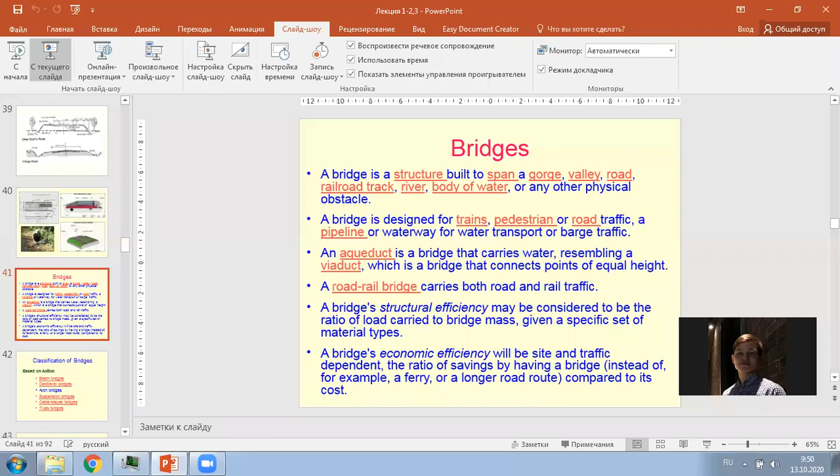Okay, so today we're going to talk about bridge construction.

A bridge is a structure built to span a physical obstacle, such as a body of water, a valley, or roads, without closing the way beneath it. This is very important for bridges, as it is constructed for the purpose of providing passage over the obstacle.

Usually, something that is otherwise difficult or impossible to cross. There are many different designs that each serve a particular purpose and apply to different situations.

Designs of bridges vary depending on firstly the function of the bridge, also the nature of the terrain near or in the construction, the material used to make it, and also the funds available to build it. The funds can be private, or from local budgets and government.

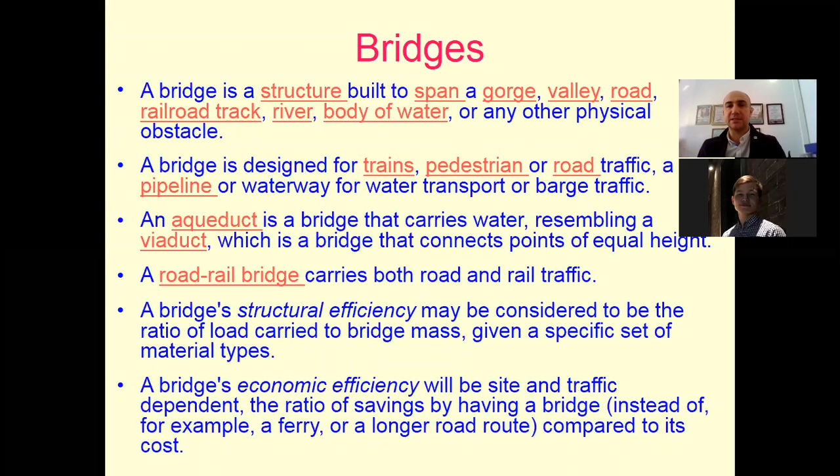Bridges can be classified by the actions of tension, compression, bending, torsion, and shear, as these forces are distributed through the structure.

If we talk about the types, we can find beam bridge, cantilever bridge, arch bridge, suspension bridge, cable stayed bridge, and truss bridge.

Most bridges will employ all of the forces at the moment. In other cases, the forces may be distributed among a large number of members, for example, as in the truss bridge.

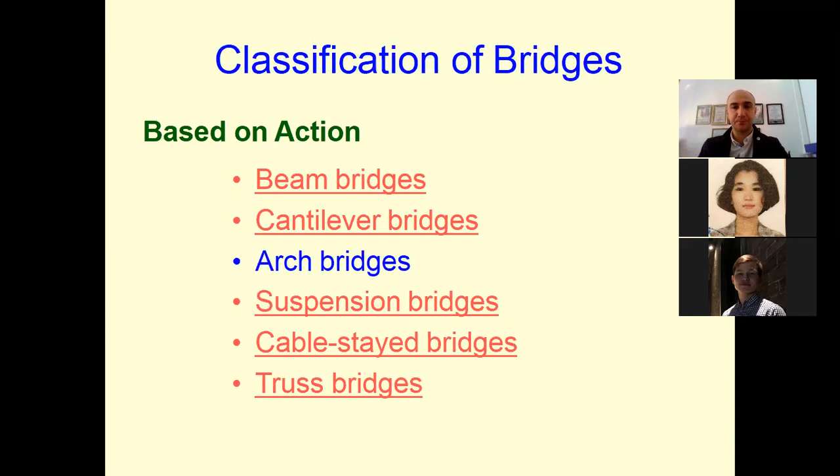If we talk about materials used to construct bridges, there are also some categories. Until, for example, the 18th century, bridges were made from simple materials like stone, masonry, and timber. But nowadays, modern bridges are currently built using more durable materials like concrete and steel.

Fiber reinforced polymers, stainless steel, or sometimes combinations of materials have become really popular, where not only one type but several types are used in combination.

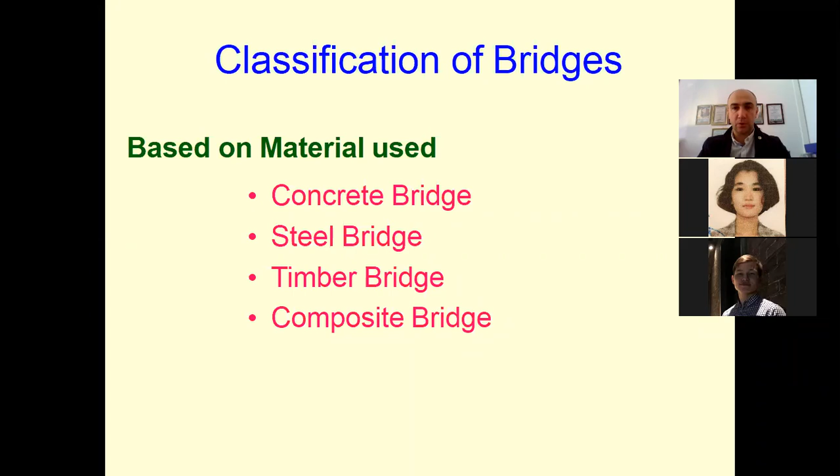The bridge also can be categorized by what they are designed to carry, such as for trains, for pedestrian purposes, road traffic, barge traffic, and so on, so actually many purposes.

Many years ago, and in some places nowadays, aqueducts were and are popular. This is a bridge which carries water from one place to another, resembling a viaduct.

A viaduct is a bridge that connects points of equal height. A road-rail bridge carries both road and rail traffic, for example. An overway is a term for a bridge that separates intersecting traffic, especially when there are traffic jams, like road and rail intersections.

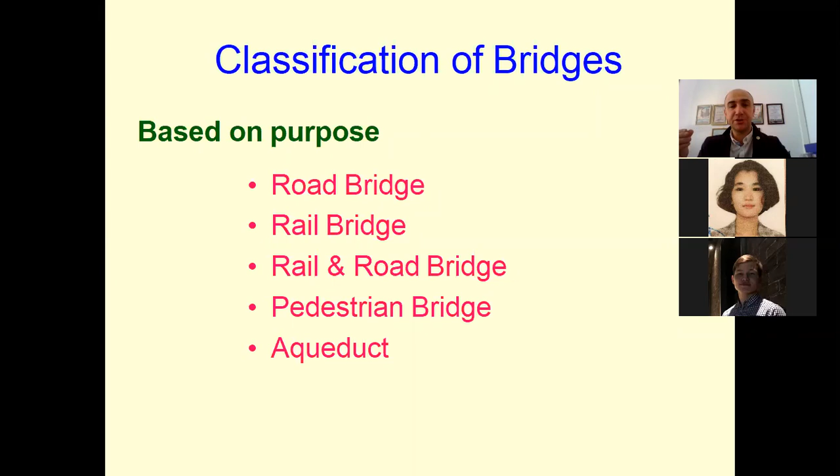Actually, some bridges, especially suspension bridges, carry transmission antennas, for example.

A bridge can also be horizontal, supported at each end by the substructure, called a fixed bridge. Other bridges can be simply supported, when the two ends of the bridge are free.

When the beams only connect across a single span, or a continuous span, beams are connected across two or more spans. When there are multiple spans through intermediate supporting points, these are well-known bridge columns like piers.

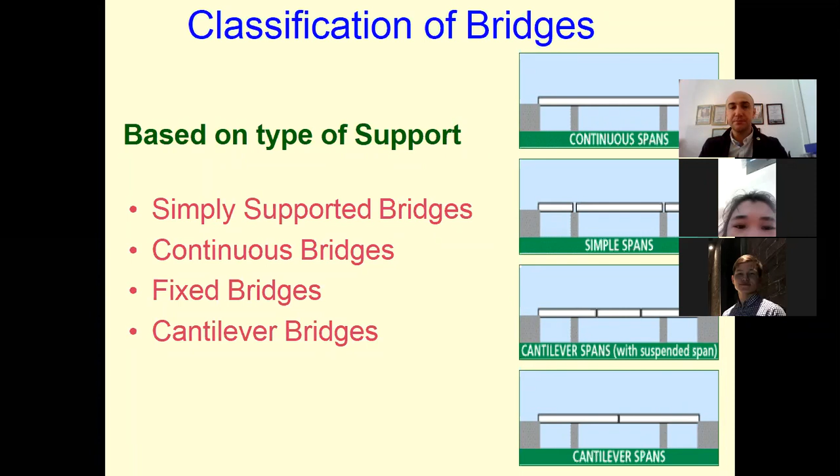So let's talk about the components of the bridge. The most important is piers. Piers provide the intermediate support between two bridge spans. The bridge piers mainly support the bridge superstructure elements and transfer the load to the foundation.

In general, piers must be strong enough to handle the horizontal loads as well, like the lateral loads. Piers are also known as compression members, because most of all they accept compression loads from the bridges.

Bearing is provided between the bridge girder and the pier cap. The main function of bearing is to allow free movement or vibration, for example if there are dynamic loads, since most bridges accept dynamic load. So there can be vibration at the top of the structure, and this reduces the effective stress to the bridge foundation.

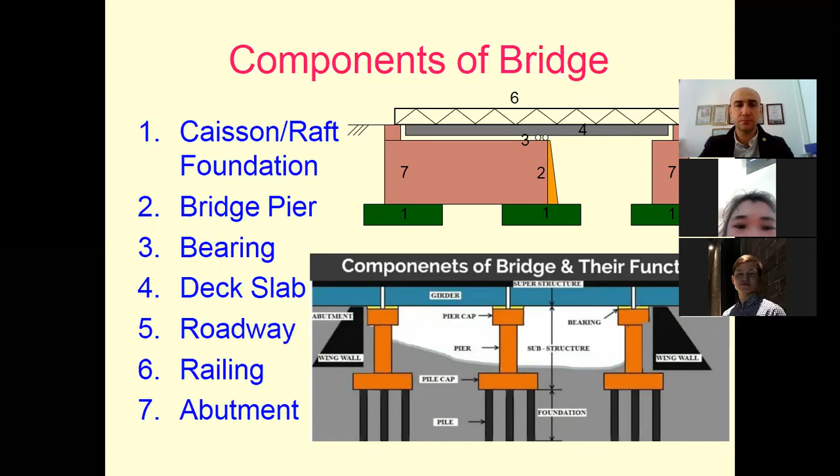Basic bridge types. If we talk about types of bridges, there are really many different types, but we can distinguish the main types: beam bridge or girder bridge, arch bridge, truss bridge, cable-stayed bridge, and suspension bridge. All of these types have their own characteristics, their own lengths, preferred materials, and so on. Each of these types will be discussed by us separately.

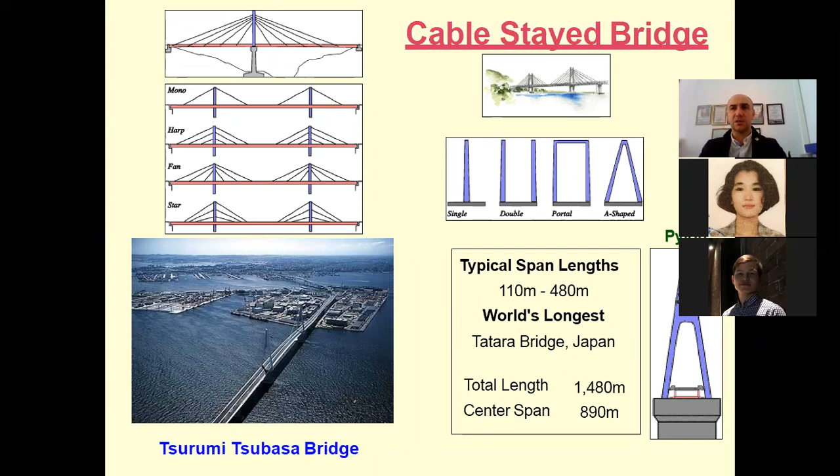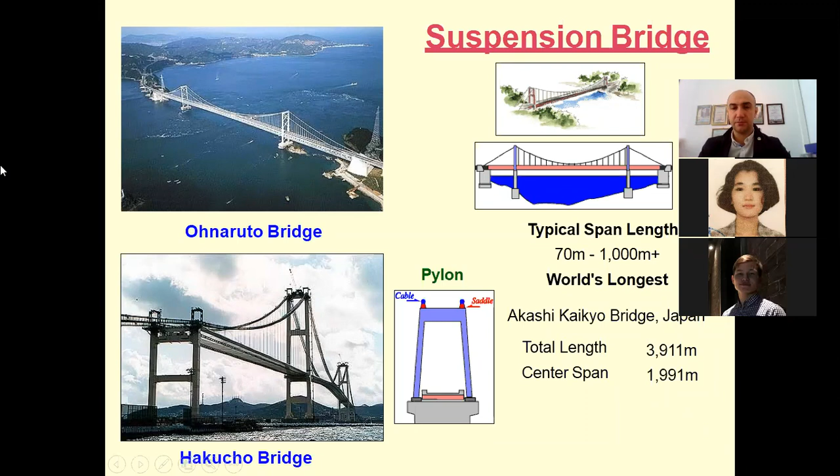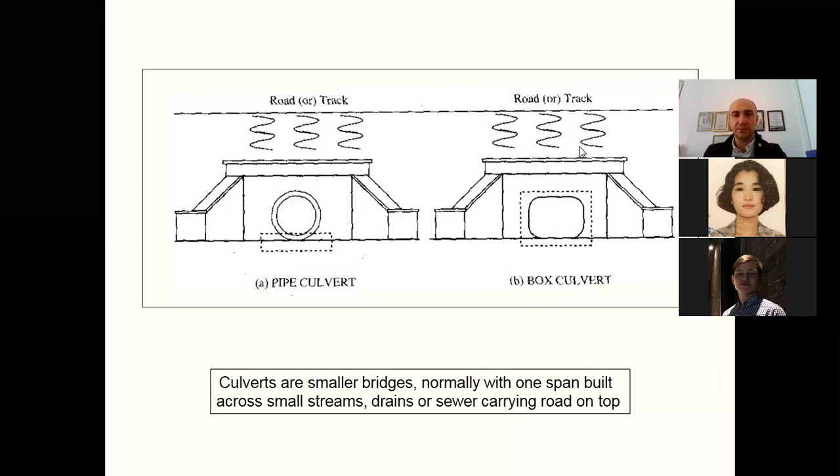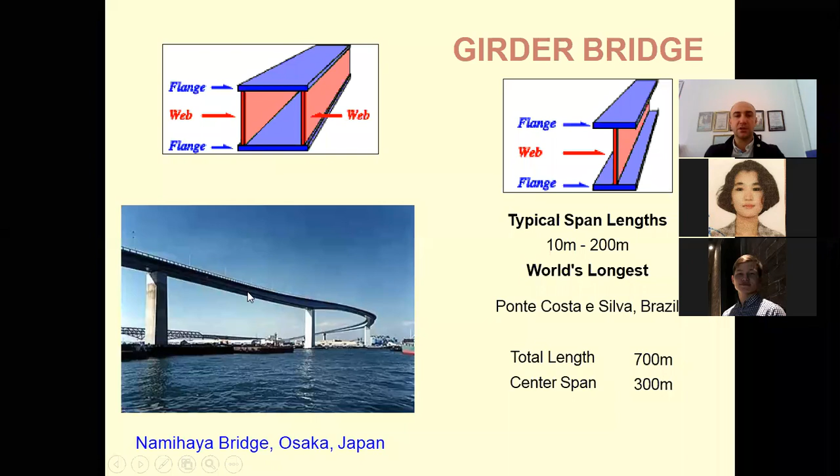Like an I-beam, a girder beam consists of two flanges and two webs. It's the most popular section for girder bridges. If the I-beam is used in simple construction, box girders or box beams are applied for larger bridge construction.